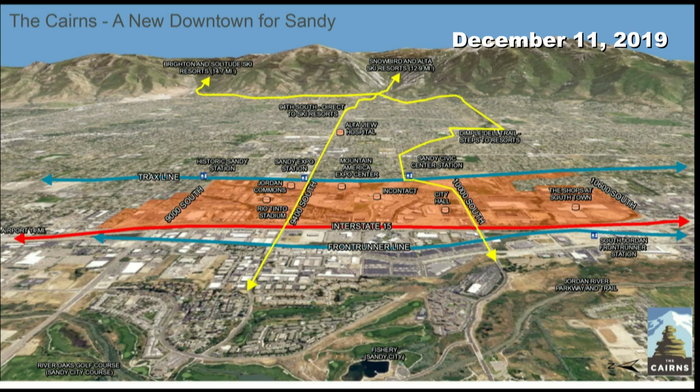There are other areas outside of Salt Lake City that are experiencing all kinds of interesting issues too. This is the Cairns in downtown Sandy.

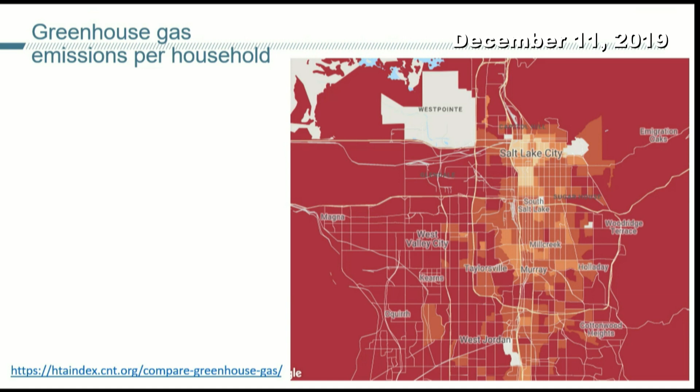Air emissions, pardon me. Part of that is because there's a better ability to walk in Salt Lake City — density, mix, and street connectivity.

And this data is available to you, and it drills down into a lot of depth, and I invite you to take a look at it. This is a really powerful metric that combines how far you can commute as well as how many origins and destinations are within that commute — it's a combination of transportation and land use.

Another data point about why Salt Lake is the best place for growth: housing and transportation combined costs are towards the lower end regionally, and part of that is because transportation costs are low. I know you're working on housing affordability.

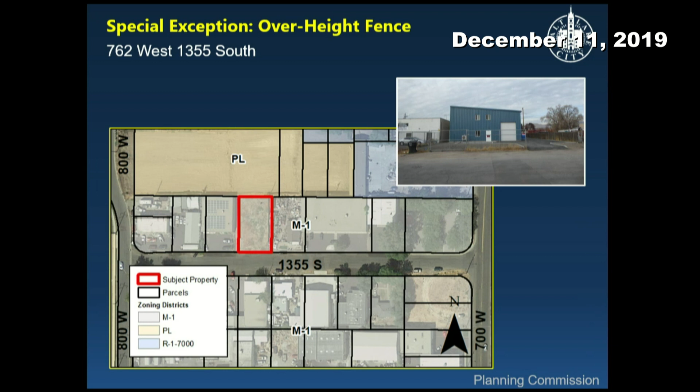Just a little brief history on this property. In 2007, it had a single-family dwelling, but we allowed it to be demolished, in which case that 6-foot chain link fence remained, as you can see in the top right. And in 2014, a 7-foot high fence was installed in replacement of that 6-foot tall fence, and there's no evidence that the city permitted that.

In the M1 zoning district, the front yard is the area within the 15 feet. It's hard to see there, but where the orange line goes up towards the property. So within this area, fences, walls, and hedges are limited up to 4 feet in height.

As shown here in the orange outline, the applicant has proposed to install a 6-foot chain link fence in the front yard along the front and side property lines, and in addition to the driveway approach, with the intent to connect it to a gate.

As mentioned before, additional fence height fences may be granted through a special exception if the proposal meets the general and specific standards of the special exception, and if it's determined that there will be no negative impacts upon the established character of the affected neighborhood and streetscape, maintenance of public and private views, and matters of public safety.

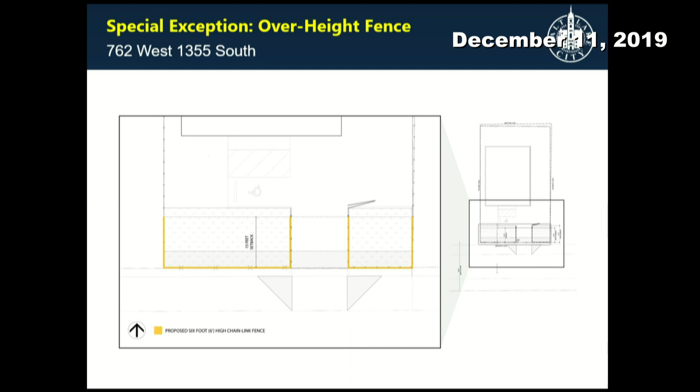Three key issues have been identified through the analysis of the project. The first issue is the application has been elevated to a planning commission hearing for the reason that it does not comply with all of the general standards for considerations for a special exception.

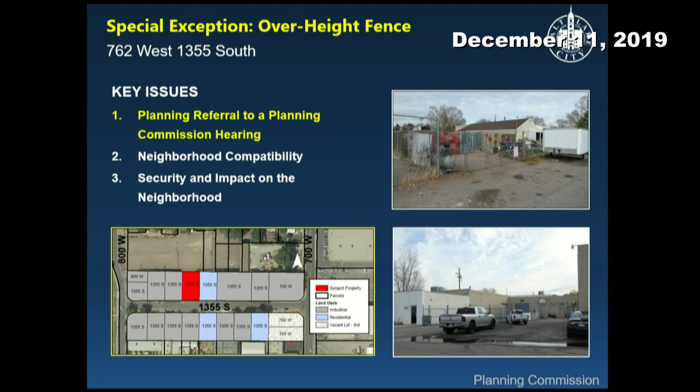However, the subject property is located in an uncharacteristic industrial neighborhood and has the challenge to balance between 1, the residential and industrial uses, and 2, the variation of existing front yard fences between the west and the east side of this block. The second issue is the neighborhood compatibility.

The subject property and majority of the surrounding properties are zoned M1, light industrial. There are light industrial uses and residential uses within this neighborhood. The residential character on this block is anticipated to change because it's within the industrial corridor within the West Side Master Plan.

But the master plan also recognizes the industrial corridor has inconsistent development patterns as residential uses abut or are surrounded by industrial uses. With the exception of the properties on the west side of the block, as shown in the images, the neighborhood character of the subject area primarily consists of fences that meet the current zoning ordinance. Therefore, the additional fence height would not be compatible with the surrounding uses and development or the neighboring properties.

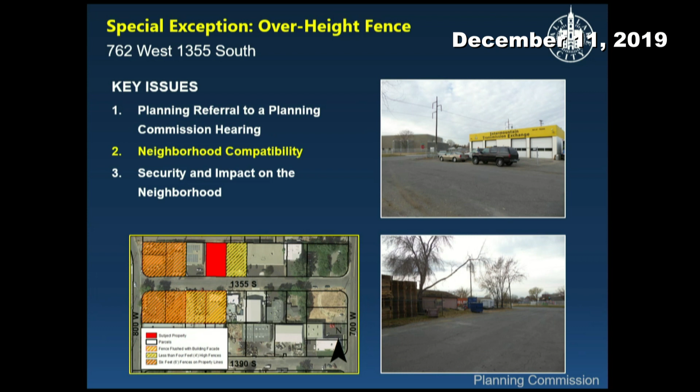The third issue is security and impact on the neighborhood. The applicant is proposing an overheight fence on the property due to the neighborhood's susceptibility to crime. The request for additional fence height would increase security and safety, but with the recently constructed building on the property, it is unclear whether susceptibility of crime may change.

The proposed overheight fence would have a negative impact upon the streetscape and character of the neighborhood. It would also be conducive to creating a precedent for the approval of front yard fences along the front property line.

As noted in the staff report, there was only one public comment received during the initial noticing, and staff has not received any additional comments since the publish of the staff report. So based on the information in the staff report, planning staff is recommending the Planning Commission deny the special exception request for an overheight fence in the front yard. This concludes my presentation.

Thank you. Any questions for staff? Did the applicant bring this to the city, or was there a complaint filed? This is applicant initiated. They submitted a building permit, and the applicant is here tonight because they can elaborate on why that is, but there was no enforcement action that brought them to submit this application.

Okay, any other questions? I have a question. You mentioned that it's in a light industrial area. Do other properties nearby have fences that are higher than the regular 4 or 5 feet?

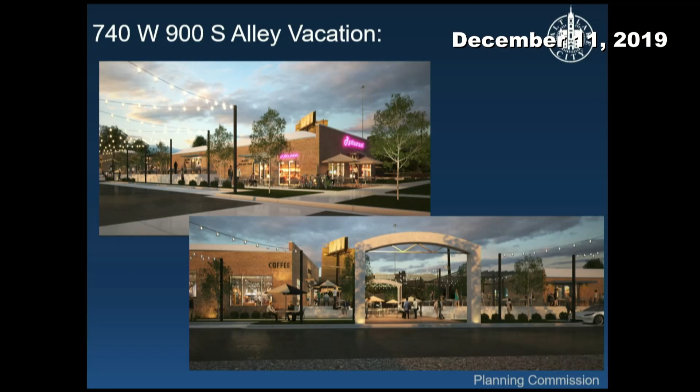I just wanted to provide these renderings so you get a sense of what conceptually—we're still in design on the project. The second image, where the archway is at, is literally where the alley vacation, the parcel that we're asking to vacate, is at.

I think the other thing to note is that we have received an RDA loan for the project as well, which was unanimously approved back in October. Great. Okay. Any questions for the applicant?

So who owns those vacant properties that abut the alley right now? Do you own them all? I'm sorry, say that again. Do you own all of the vacant properties that abut the alley? Yeah, the two adjacent properties are the two buildings, yes. Okay, so there's no other property owner that owns one of those vacant properties at all? No. Okay.

Any other questions? I do, sir. So regarding recording an easement because of the sewer line, why do you even need to vacate the alley if you're going to still have to maintain public access to get to that? Sometimes I don't understand why you want to take something out of a public use if you have to keep a public element to it.

Well, we couldn't build that public square because it's not our land. So you see where the arch is, that's the public square—you're still going to have to maintain an easement so people can come in and rip it up if they need to get to the sewer. Yes, I think we're fine with that. I think we can build around that. We just want to be able to join the two buildings to create that nexus of activity. All right.

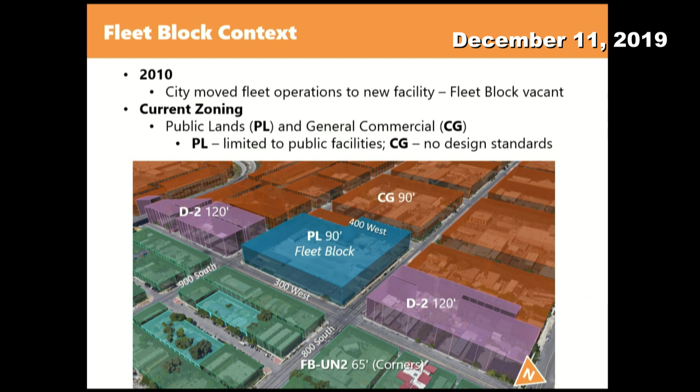So just for context, this was used for fleet operations for decades. The current zoning is public lands, limited to public facilities, and also the private portion is general commercial, which allows for a variety of commercial uses but has no design standards.

The downtown plan calls for the Fleet Block to have the best of urban family living and industry, the mixing of land uses once thought to be incompatible, and improve the connections that focus on putting people first.

So for more context, this is surrounded by D2 zoning on the south and the north, and then CG predominantly on the west side of the property.

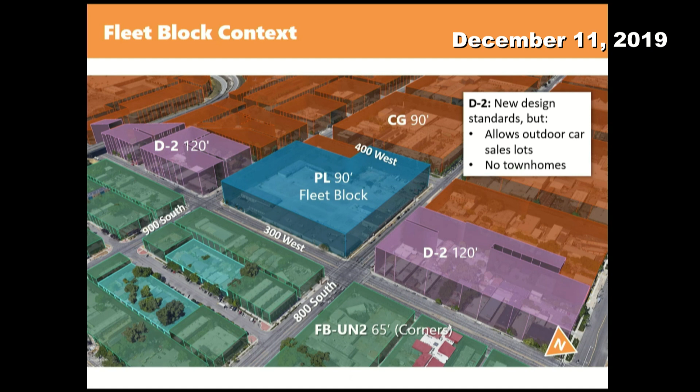So the main components of the form-based urban neighborhood 3 - the main points are that it does allow for mid-rise heights, it does have design controls, and it will allow for a broad mix of uses from residential, row homes, townhomes, up to light industrial uses like light manufacturing.

And with a form-based code, you have a building form, and then it has bulk controls, heights and setbacks, design standards, things like windows and entries, lists of land uses, streetscape requirements, parking, and sign standards.

So the main difference with the proposal from July is that we took out the limited bay form from the allowed building forms. So what we're proposing now is allowing for a row house building form, as well as what is the vertical mixed use, multifamily, and storefront building forms.

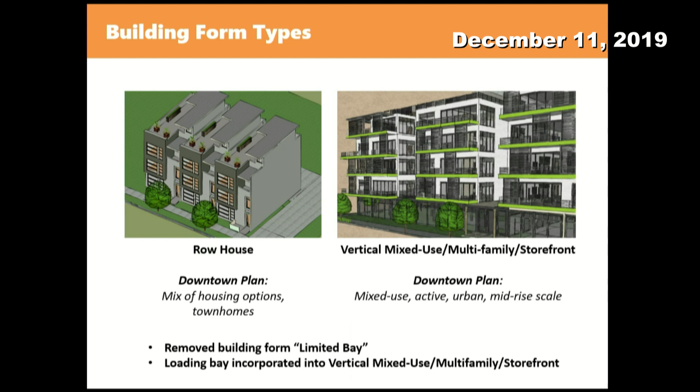The limited bay was pretty much essentially like the vertical mixed use building form. It just had a slightly lower height allowance, and the key thing was it allowed for a front-loading bay. Because they were so similar, we just got rid of the limited bay building form and incorporated that front-loading bay allowance into the vertical mixed-use multifamily storefront building form.

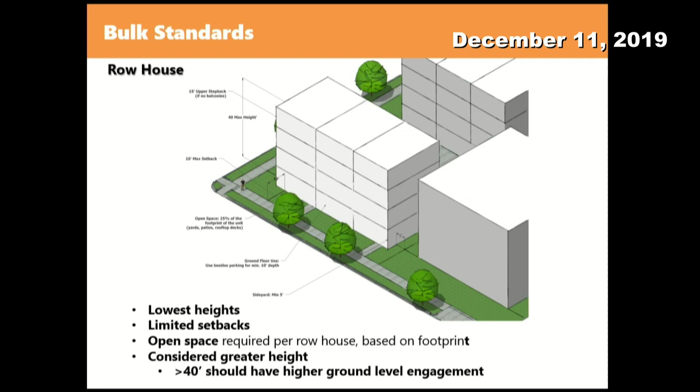These are the row house standards. One thing that came up at the Planning Commission briefing was maybe we should get rid of the 40-foot height allowance for row houses and just have a higher height allowance. We thought about that, but ultimately determined that a building higher than 40 feet should have a greater contribution to the public realm, to bring some level of activity on the street level, which is required with vertical mixed-use building forms. So we kept the row house limit at 40 feet, and if someone is going to build taller, they'd have to comply with the other building form requirements for vertical mixed use. Row houses are strictly residential.

These are the bulk standards for the vertical mixed use. They're predominantly the same as they were in July. The max height is mid-rise, allowing up to a 125-foot height allowance. Tallest buildings over 85 feet have to go through a design review process, meaning it would come before the Planning Commission. The key difference with this building form is that we did incorporate that front-loading bay allowance into the building form regulations.

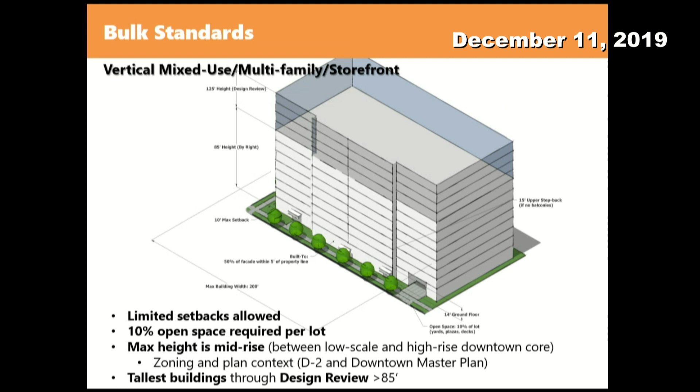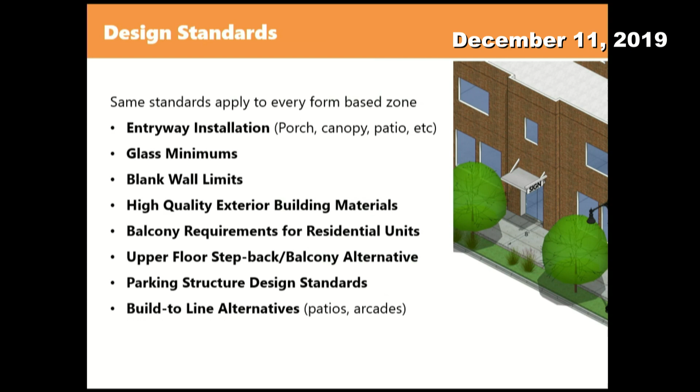Design standards are all the same in all the form-based zones: entryway requirements, glass minimums, blank wall limits. The same standards that apply in all those form-based zones would apply here.

Land uses, again, the broad list of allowed land uses. One of the key changes is that we are prohibiting warehouse and storage uses along the ground floor next to the sidewalk because they really have no pedestrian engagement. It's kind of a dead space, so we took those out. You could still do that behind a more active use, hidden behind that more active use on the ground floor.

There's also the parking location limits, side and behind. Parking is allowed side or behind buildings. Sidewalk requirements are 8 feet, with street trees every 30 feet. Mid-block walkways were identified in a city master plan. The sign allowances in this zone are fairly similar to the Sugar House and downtown zones.

So the changes since July: we eliminated the limited bay form and incorporated that loading bay allowance into the other forms. One of the other key things is that we are now proposing to require more active uses like retail, restaurants, bars, businesses with publicly accessible portions of their business right up front on the ground floor. Those would be required when facing 900 South.

Like a lobby for an apartment building? A lobby would qualify if it was publicly accessible, yeah. This is intended to ensure more active uses along the 900 South Greenway 9-line trail, which is the connection from the east side of the city to the Jordan River. The city intends to do significant infrastructure improvements here in the long term. So this would require more active uses along that street, along 900 South. As part of that, townhomes would be required to have a live-work component or a work component on the ground floor.

So if you talk about having, on the ground floor, restrictions to strictly retail or other uses like that, I just want to make sure that it would also include lobbies for office use. Because one of the plans we have initially is that the corner of the fleet block on the southwest side would actually be one of these heavy timber office buildings. And then also the restriction of having only one entrance per face.

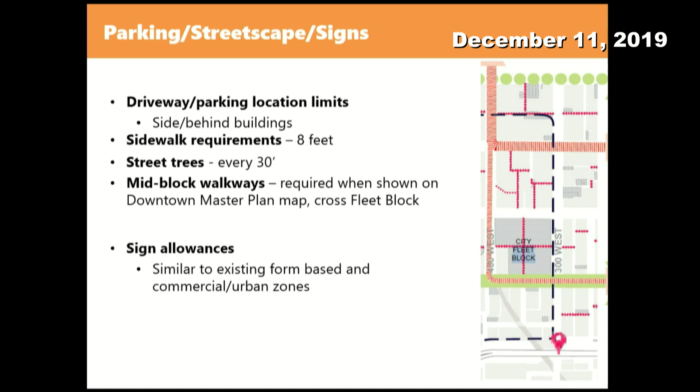I think if we were to build an office building there, we would want one there, and to divide the block, you would probably want one on your side as well.

So just thinking about having multiple uses on this block. The other thing would be the one entry per every 75 feet. I understand the intent there, but if we're building a larger scale office building or a bigger type building in the area, that may not work for an entry point.

For fire code, fire exiting, and things like that, we would obviously adhere to those things. On quality exterior building materials, we would fully intend to have a beautiful building that would be well received by the public, but restricting it to certain things such as brick and concrete, I think it constrains what we can do with building materials, especially nowadays.

You see a lot of exposed steel in columns, or heavy timber buildings have exposed heavy timber on the exterior. Corten metal is another building material that's been used in these types of areas that's very unique.

So I know my time's up, so appreciate the time and look forward to being back in front of you with other project plans, but just keep in mind large-scale development, I guess.

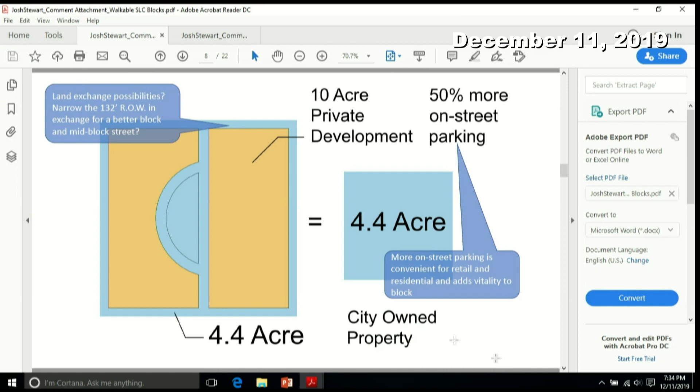And so there's opportunity to change up these. You could do, this could be a development, if we just bisect this block, we've missed our opportunity to do something great, and we've got to have some plans, like you could do something like this where it breaks it up.

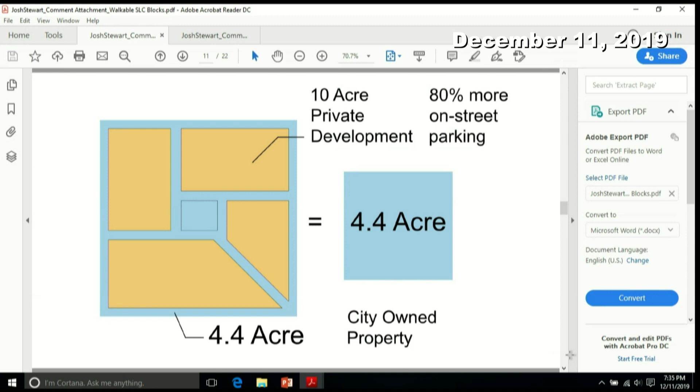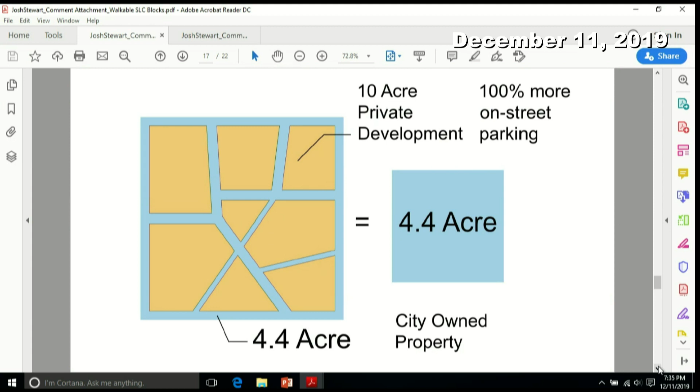Like Savannah, or Louisburg Square in Boston, we've got to have some open space integrated into this zoning. We could really break this up. We could create stuff like this.

I mean, we've got to have a plan to go along with this. And my issue is the connectivity needs to be addressed. We need to have real roads, real plan, real open space, all designed.

And you could put out an RFP to get planners to come in and plan it. And then maybe the way that it gets broken up, you might have different zoning on the different blocks. So it's not really good to just overlay this with one zone, because it could be totally dynamic space.

So anyway, this is just my comments that we need to raise the bar a little bit. We got to do better than the hardware development over there. I mean, that ended up pretty sad. But anyway, thank you very much.

And there's one last comment card I'm going to read from Tim Dwyer. The proposed FBUN-3 zone has no practical considerations for parking, a key requirement for the successful development of a generally urban, dense, and diverse development located between two freeway access points.

As an existing business next to the fleet block, we already see a lack of parking in the area and are concerned about the unrealistic view of parking requirements for fleet block under the proposed FBUN-3 zoning text. Recommend to reject current proposal.